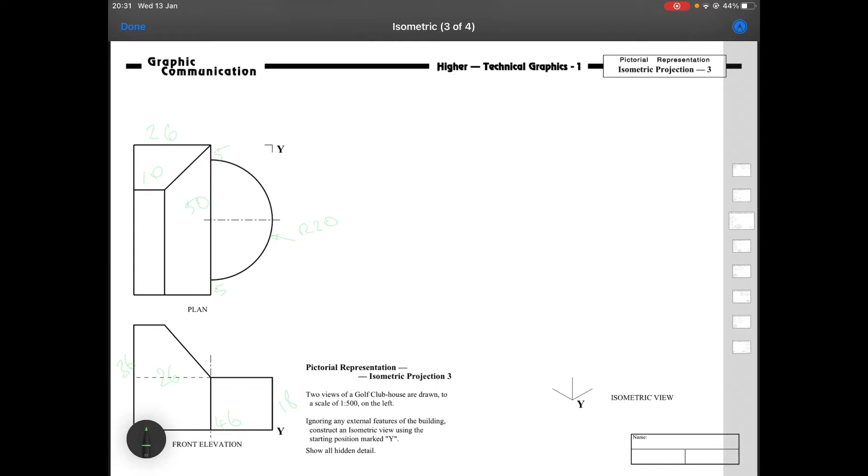I'm going to be using the iPad to do this. If you have a printed version, you can use that, but there's drawing 4 and drawing 5 in this series. That's video 2 here, and video 3 will be here. I'm going to use the iPad to sketch this out.

Like I said before, there's a couple of things to do first. I've got the PDF open here, a document that's available on Teams.

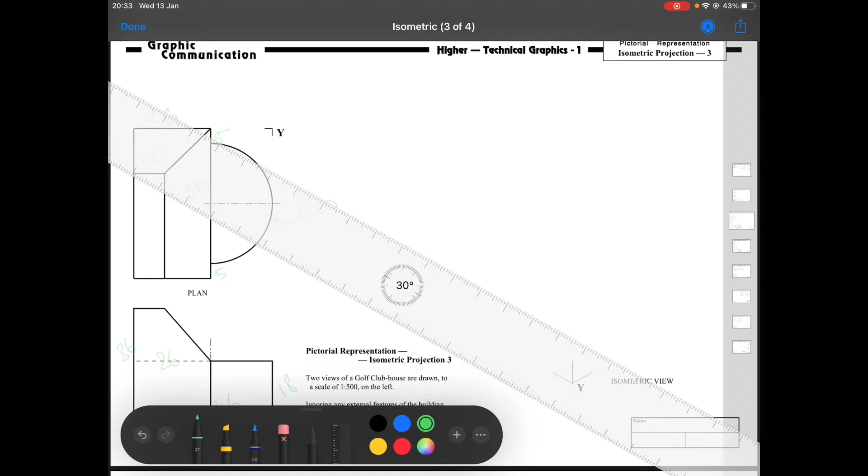Last time we were looking at the rules of isometrics, keeping any line that would be horizontal at 30 degrees, either going in this direction or 30 degrees in that direction. The further apart your fingers are on the ruler when rotating it, the easier it is to zoom in and get an accurate measurement.

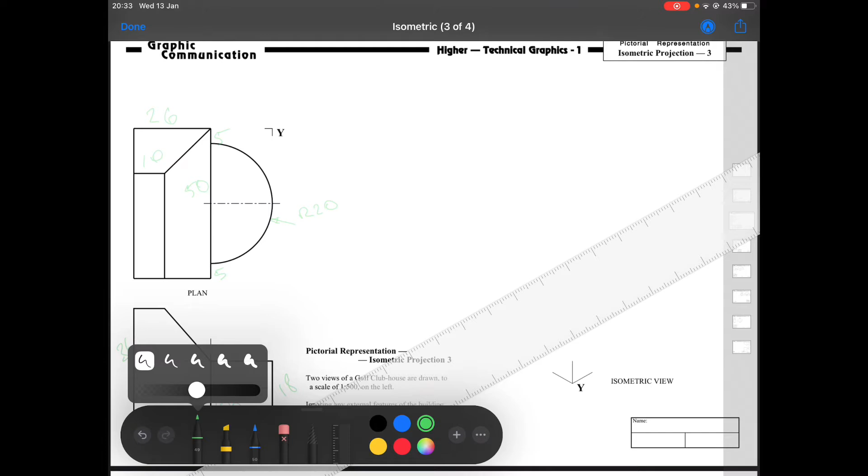Like I said in my last video, I'm going to use green for my construction lines, and when I come to detail I'll use a different colour, maybe blue or red, and outlines will be black. I'll change the pen settings to make it a thicker, more opaque line. So I'm just going to jump in here and put in some boxes, make a big box that'll house this whole thing.

I'm going to draw these lines quite large, oversized, and you'll see on the orthographic views, the plan and front elevation, I've already put in the sizes ahead of time.

That saves you watching me measure and count twice, once to measure it and once to put it out here. So for the overall box, this size is 5, then from this point to this point is 20, and this point to this point is 20, then another 5 at the top. That gives us 50 altogether, 50 millimeters.

So I'll line that up there and count along: 10, 20, 30, 40, 50. Going in the opposite direction, from front to back, we've got the front corner here, and we need to mark on where the back is.

On the front elevation we've got the front and the back, and I measured that ahead of time, and that size is 46. So I'm going to mark on 10, 20, 30, 40, and 6 is just about there.

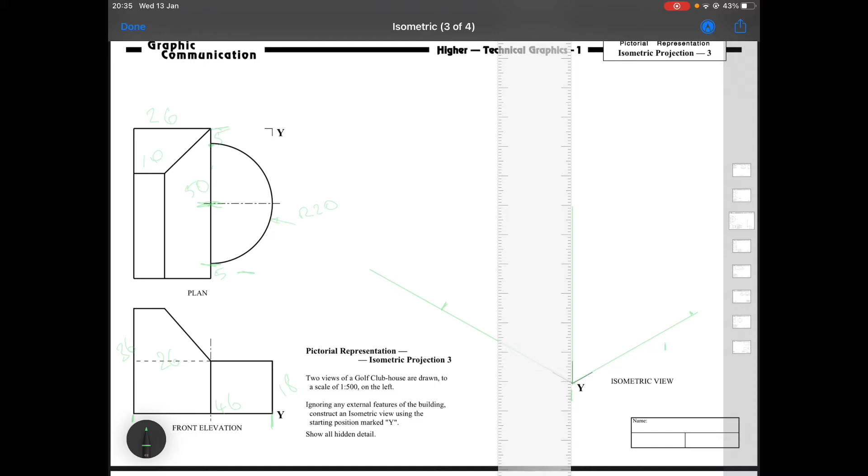Next thing is I'll put on an overall height line for this whole thing, and that is 36 millimeters: 10, 20, 30, 6, gives me just about there.

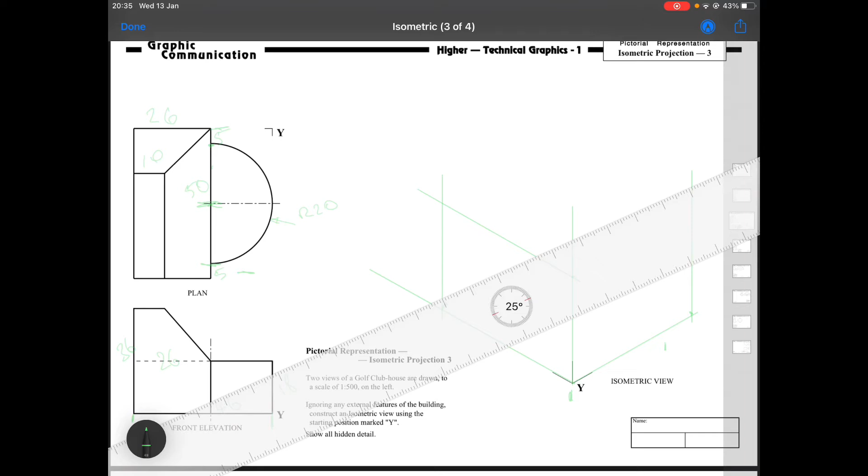Now, since I've got the ruler this way, I'm going to draw these lines up, rotate it around to 30 degrees. The really good thing about isometric sketching is if you get used to holding your ruler at the angle, you really only need to measure once, and trust the ruler and yourself that you know the angle right. It makes this more efficient instead of measuring every single line.

So I'll weave that back there as well. Great, that gives us an outside box. Effectively what I've done is taken a box and drawn it around the whole thing so I can work backwards from the front edge and get the centre point.

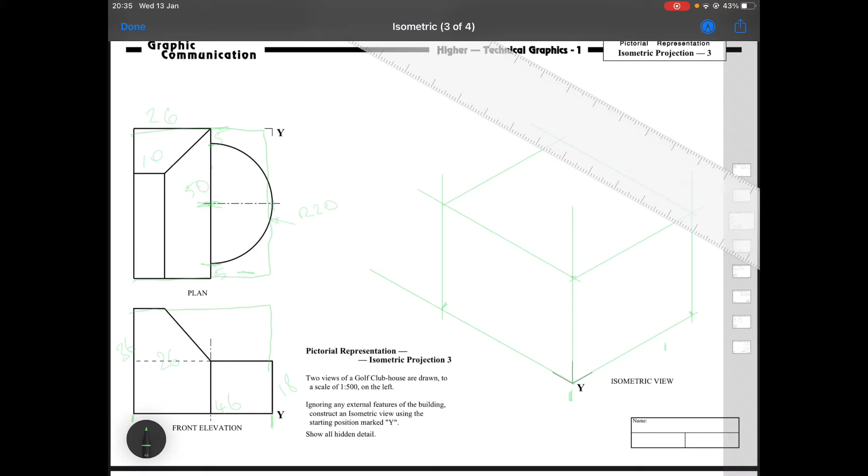First thing I need to do is find where the centre point lies on the front edge. So I'm going to line up a ruler, measure 25 up because the whole thing's 50, flip my ruler around to 30 degrees in the opposite direction, and draw that line back.

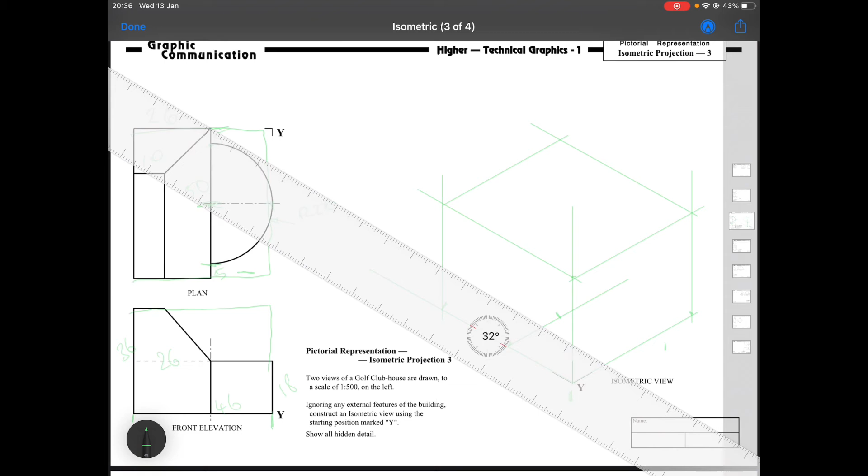Now that's radius 20, so I can line up one of the long lines with that and come back 20 millimeters, flip around to 30 degrees in the opposite direction, and just sketch that bit in.

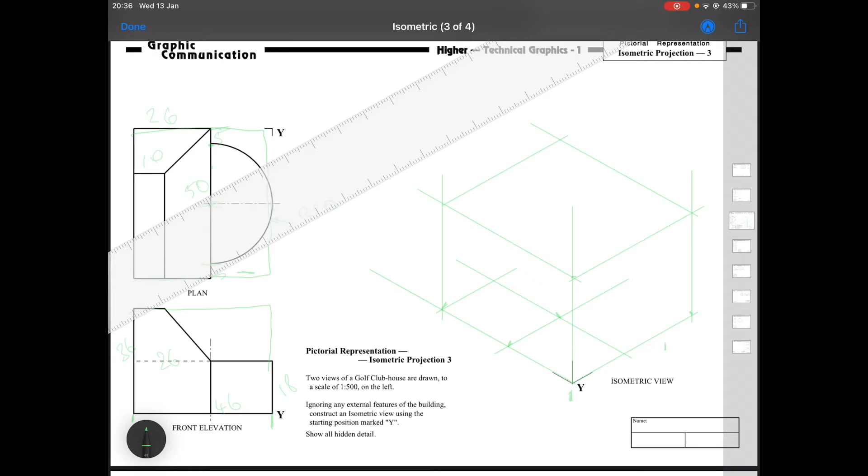Now I did miss a line before when I was doing my construction, so I'll put it in now, just from this bottom corner going back the way, and that way we have what looks like where we can sketch out our isometric circle. I mentioned in a previous video that it's easier to do all your sketching on top and then bring those sizes down.

To do that, first I'm going to take each of these points up and measure up those lines, drawing what you could think of as another work plane on the top.

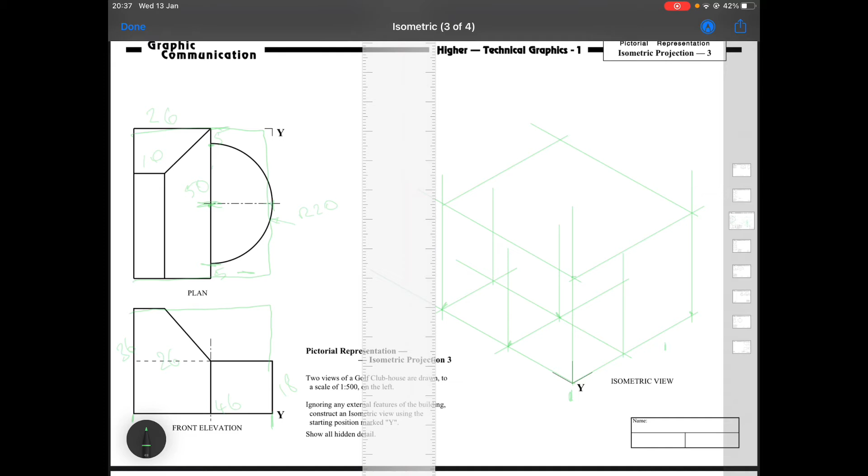I need to measure up those lines 18, lining that up and coming up to about 18 gives me there. Measure once, and then I can use my ruler at the right angles to take these sizes right across. There's 18 there as well.

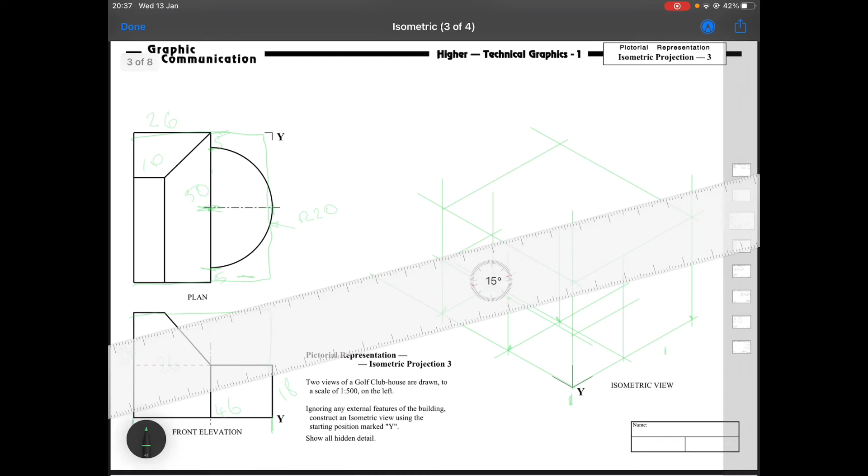If I measure this out, you can see my work's quite inaccurate, so that size might not be 18, but I'm not fussed about accuracy at the moment, because I know drawing on an iPad with your finger isn't the most accurate thing.

Draw that line back as well. So there we've got 2 rectangle shapes at the top. Here's one here, and the other rectangle shape is there. Now, if that's going to be a circle, then these need to be square shapes.

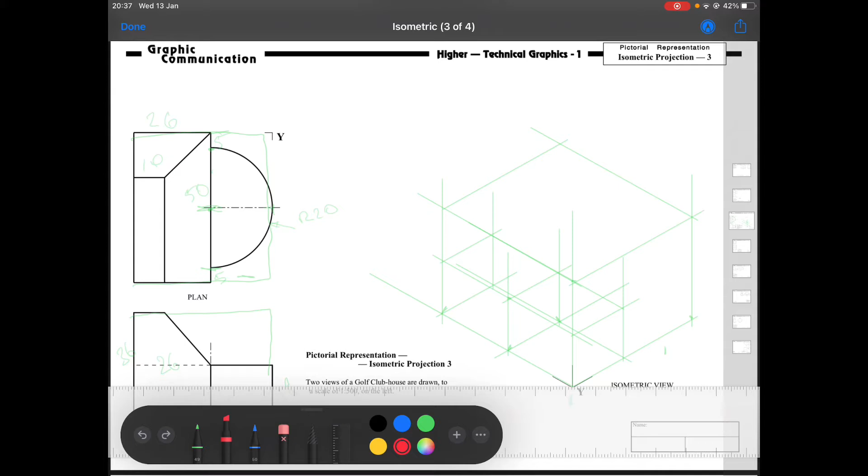You'll notice I've missed something out here. I've missed this wee mark that's 5mm in from the edge. It's probably too heavy on the ink. I've missed out on the edge just here, the 5mm, and the 5mm here as well.

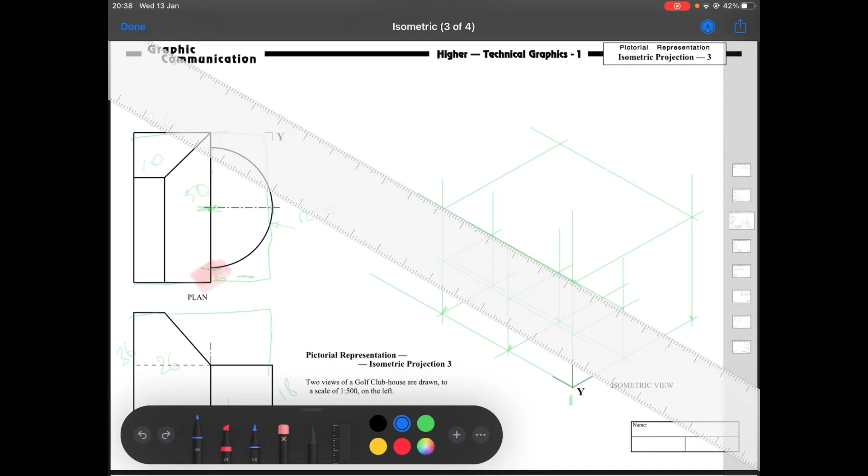So I'm going to go ahead and draw them in just now. I think now's a good time to flip over to a different colour so as not to confuse everything else. Measuring up here from that edge, 5mm gives me a mark there, and 5mm in from the other side is a mark there. Now, if I bring these lines down at 30 degrees, you see the shape looks a bit more like a square.

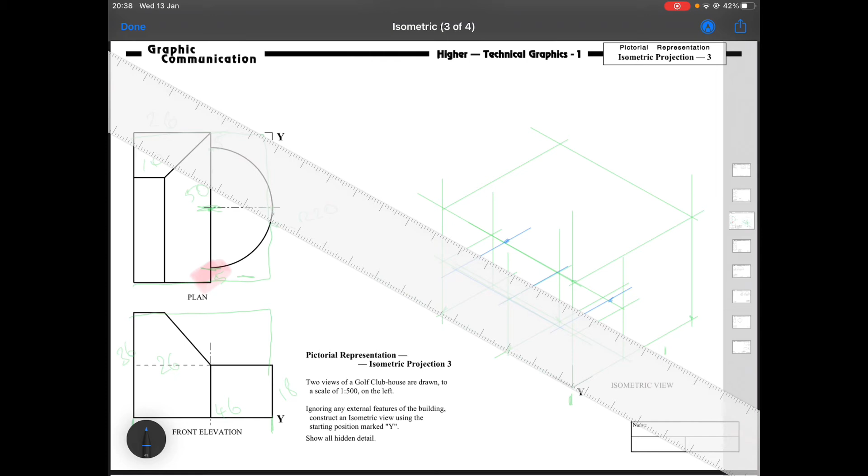I'm just going to go over these with a different colour so you can get a clearer idea of what lines I'm actually drawing and where they are. So inside this box here, and this box, we need to divide that up by joining the corners, starting from the centre line.

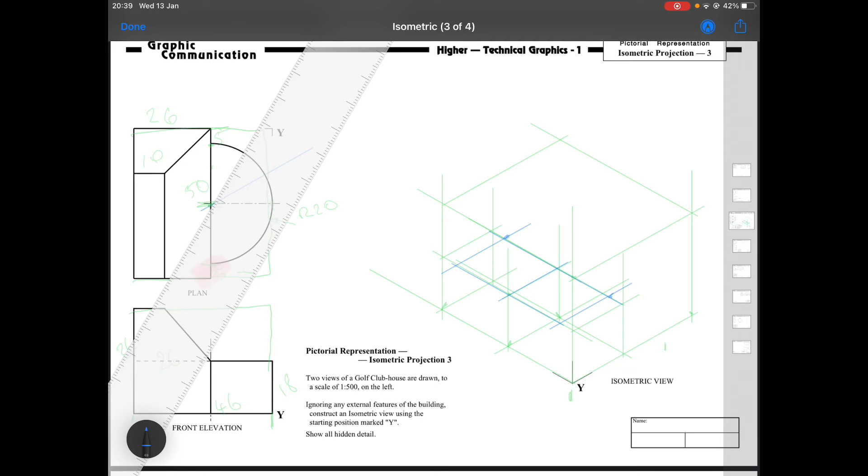In previous worked examples of this, I went through the old clock facing where you have a line at 30 degrees and then a line at 60 degrees like this, and that should give you enough segments. I'm going to scrap all that today and just draw a line at 45 degrees down from there. You don't need to draw this line, I'm just trying to highlight some of the theory for you.

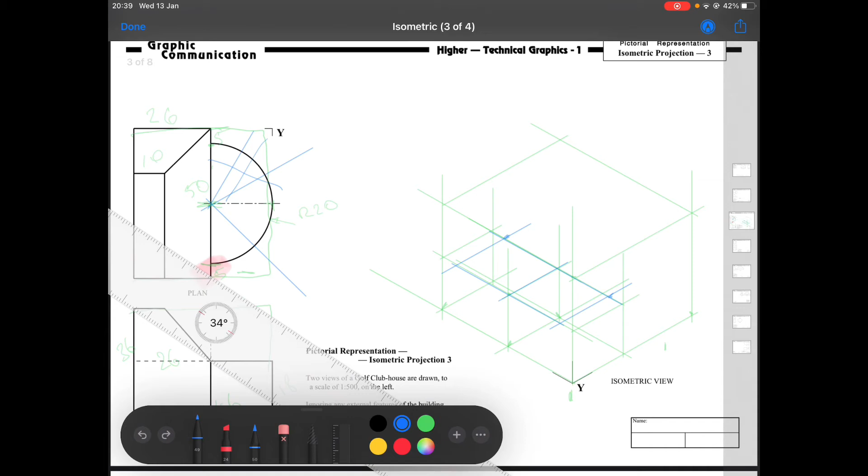So if we treat this as the centre point, that is this point over here that I've drawn in, and if we take it from that centre line, the centre point there, we can try and line up.

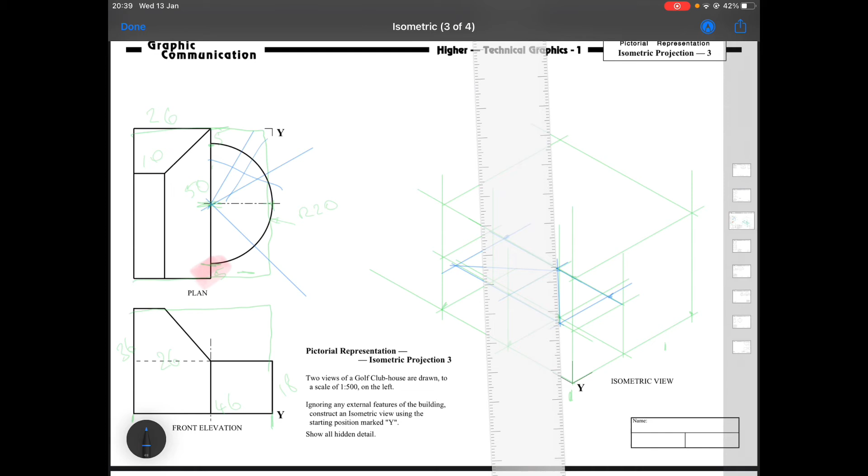Now the next step we need to do is plot points on this line. So if we take this line here, that looks like a horizontal line, and if we divide it in half, and then roughly the distance between here and here, if we half that again, that gives us another mark. I'm going to go ahead and get rid of those arrows to try and clear this picture up a bit, but half it and then half it again, going towards the corner. Same thing here, half it and half it again.

These 2 outside points give us an accurate location for drawing in our isometric curve like that. A wee bit shaky handed, it's a lot smoother to draw it out and away from yourself. So that there is the isometric curve constructed.

I'm going to just draw all these points down, about 18mm, and measure these points on it. 18's there, 18 gives us here. Oh, I've already got that point. 18 gives us here. I've actually not made that line long enough, and 18 on this line gives us there. In fact, the 18 on that line gives us there.

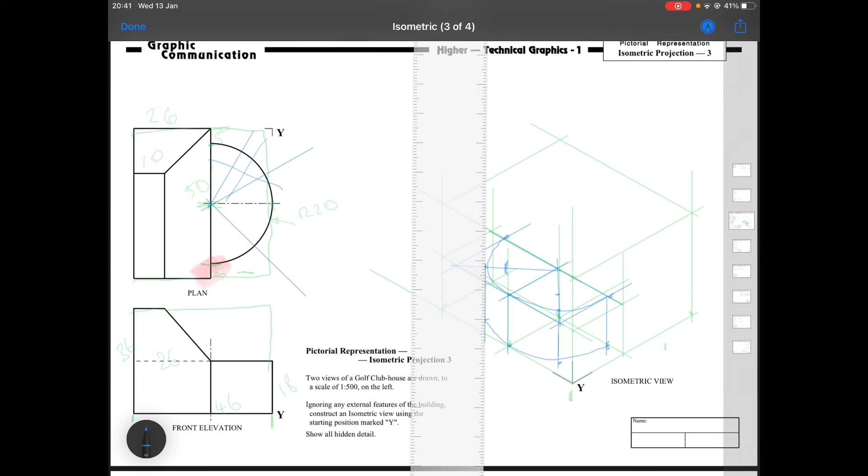So now I can flick that right round and draw in the bottom curve of our isometric circle. I'm not too fussed about outlining this yet because we're going to go over it in a bold line later.

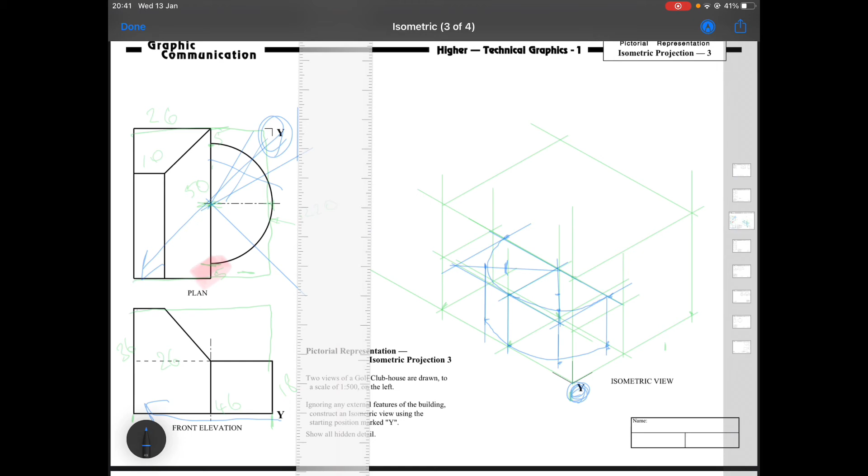So the next thing we need to do, if we're considering that corner Y here is down here, then we can see that in the opposite corner is where this is going to be the highest. So you can see corner Y there, right in the opposite corner is going to be the highest point. In this drawing, that's about there. Undo some of this.

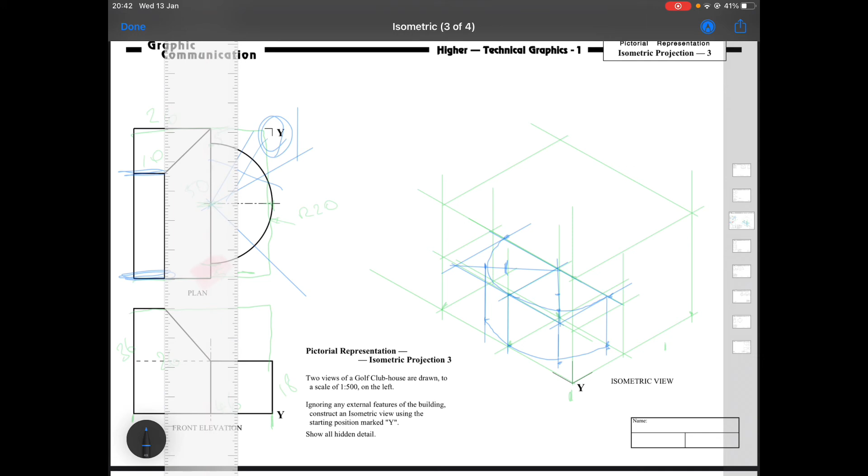So we're going to use this as a starting point and measure down the distance we need to come. Overall, the one size I didn't put in is the length from here, from that black line to that black line. So I just need to measure that quick now. That is 10, 20, 36. So rotate the ruler round, measure down 36.

I'll maybe change this to a different colour as well. How about a nice purple? 10, 20, 36. Gives us a point right there. And if we draw this coming in 30 degrees in the opposite direction, like that, then we can measure 10 down here. It's 10, and that gives us the point that we need. So what we've just sketched in there is this point right here.

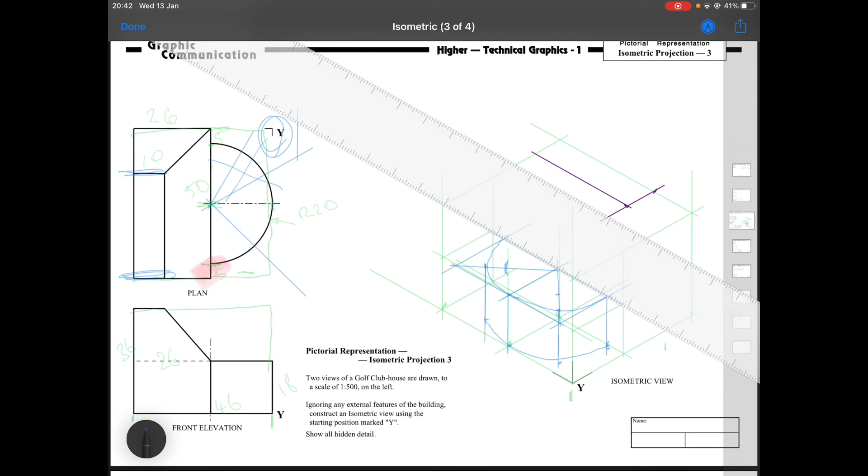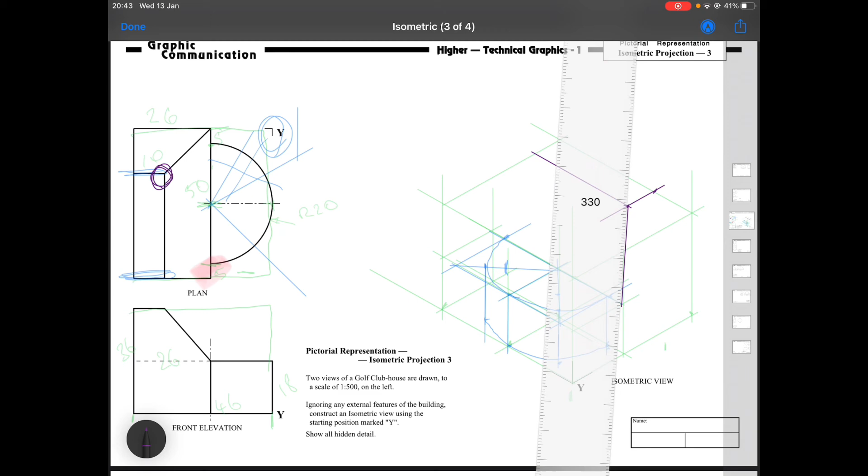And we can use that, use the old start and stop technique. We know where the line starts, we know where it stops. So we can line up our ruler with that, hopefully if it doesn't snap, and draw that line up. And we're just about ready to outline now because we know the starting point and the stopping point of each line. So let me just take this up and outline it in purple so you can see, and I'll do the rest of the outlining in time lapse.

Something else I've missed here is bringing this edge right across. Now there isn't actually an edge there. Well, there is an edge there. I missed bringing that edge across, and that would join up to this point. So wherever the lines cross over, that's your intersection point, and that there gives us a good view, a good construction of how this looks. I'm going to go ahead and do this in time lapse now.